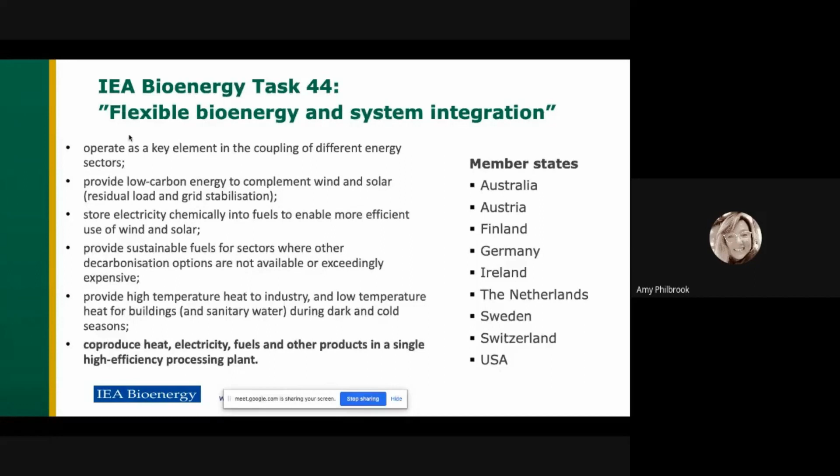I'd like to give a big shout out to Lisa for organizing this and all the other webinars. There was a lot of interest in attending, as you can see from the very good attendance. The first presenter today is from Australia, Richard Gorman, CEO and co-owner of Kalfresh, a Queensland-based vegetable farming company which grows and sells produce to retail and food customers in Australia and overseas. The work that Richard and his team are doing has really inspired the topic today. Richard, I'd like to invite you to give your presentation and perhaps introduce Kalfresh as well.

Thanks. Kalfresh is a vertically integrated vegetable processing business. We grow, pack and sell vegetables.

Now, part of our future is further processing, which involves more buildings, more supply, and above all, more energy - energy to process the crops - and that's provided us with a few challenges.

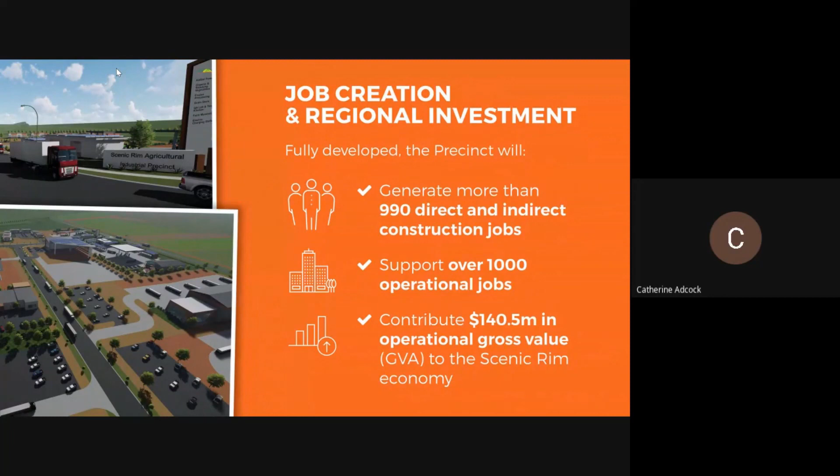Some of the challenges we face are that as the specifications for what we grow get harder and tougher, we've been focused on creating use for our waste. But we've now realised, once we started looking into anaerobic digestion, that you provide a waste solution for other people around you.

So we saw the opportunity to create base load renewable energy. That got us thinking, well, we're energy producers - whether you're eating it, or putting it through your digester, and we're consuming it to cool the crops or heat the crops, to us it's all energy.

And then the other energy we consume a lot of is nutrition in the way we feed our crops. In the last 5 years, we've really increased the amount of organic fertiliser that we use.

Currently we're one of the largest users of a by-product of ethanol production called Dunder, out of an ethanol plant in Sarina. And so we've learned to use the high volume, low concentrated liquid forms of organic fertiliser.

And I guess we thought, well, let's have a look at co-digesting not just our waste, but some of the energy crop that we can grow in rotation, and see what we can produce out the other end of it. And let's put a value on that as a fertiliser.

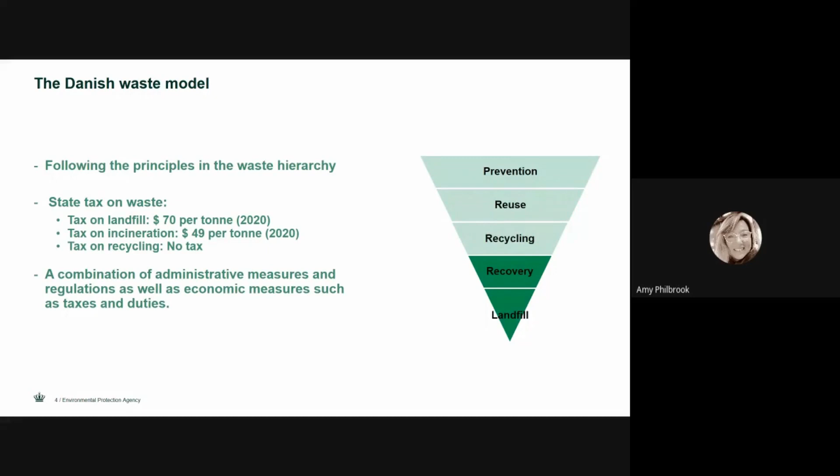One important thing when it comes to the Danish waste model is that household waste is a municipal scheme, collected in a municipal scheme, so that has one stream. Businesses are a private scheme—different kinds of service sectors, construction and demolishing, and agriculture have their own system with private collectors. They also are part of the pre-treatment system and become part of the whole waste treatment system. But the collection is very different between the household and the businesses, and that's the important part here. I will come back to that.

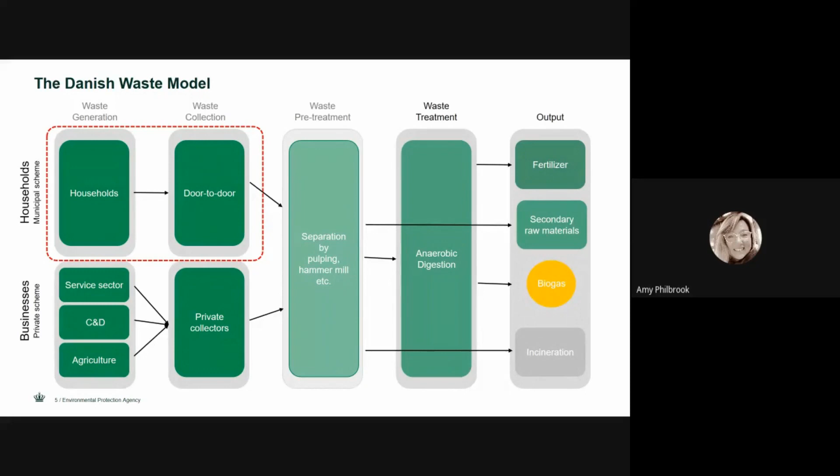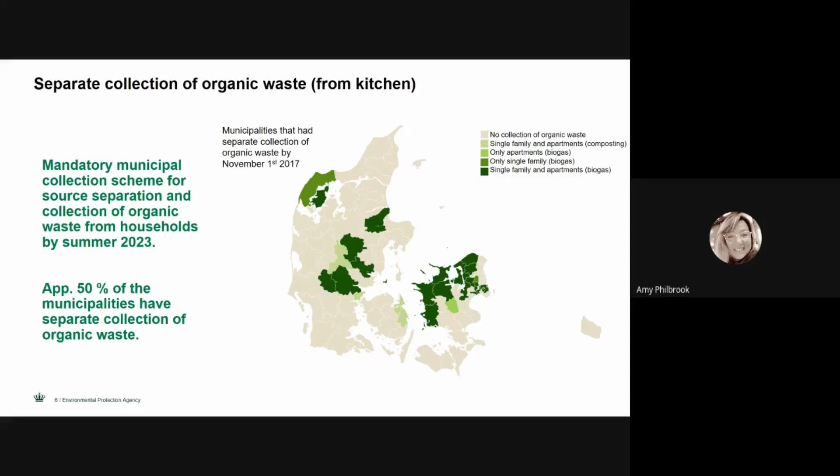Well, if we look at the feedstock, now it's going to be more interesting for all of you. We have a lot of pigs in Denmark—actually, the number of pigs in Denmark is 6 times larger than the number of human inhabitants, and that gives us a lot of manure. It has nearly no physical impurities, so it can just be put into biogas plants.

Then we have this focus on circular economy, and it gives us the food waste from the service sector. It has some physical impurities, and then we have industrial food waste. We also have some physical impurities that could be different kinds of packaging, and then we have the households, and that's the big challenge in the system in Denmark.

In some places, some parts of towns, they are not that good at sorting the waste, so we have a lot of plastic, metal, textiles, glass, all kinds of things that go into the household bin for organic waste, and we have to deal with that. That's where we are looking at different kinds of technologies, and we have some very good companies in Denmark that have some very good pre-treatment systems where these technologies can take out a lot of the impurities, even though there will still be some kind of impurities, and that's what we are looking at.

Then the material goes into anaerobic digestion, and becomes biogas and bio-fertilizers. This is a huge product, and there's a huge amount of biofertilizer coming from these anaerobic digestions. It's important that we keep it as clean as possible, so we avoid contamination of the environment.

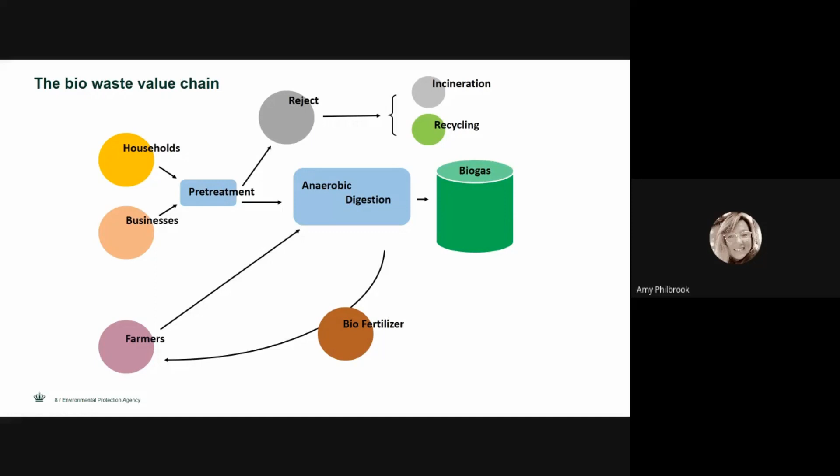We have put up a quality control system, based on the statutory order, with a guideline saying the production line has to take daily samples and mix them into a monthly sample. What we're looking into is content limits where plastic, glass, and composite materials larger than 2 millimeters have a limit of 0.5 weight percentage of dry matter. Plastic larger than 2 millimeters is only allowed to be 0.15 weight percentage of dry matter, and more importantly, maximum 1 square centimeter per percent dry matter in 1 liter of biopulp.

These are the limits for physical impurities, and plastic is very important here because it's the one that contaminates the most. That's why we're happy to have companies that are actually capable of producing a product that fits these standards.

Where do we do the sampling? In Denmark, we do the sampling before the anaerobic digestion. The reason is that we're not allowed to make a dilution where we just put the contamination into a bigger volume and add water or something. So we just have less contamination material in one big batch—we have to do it before.

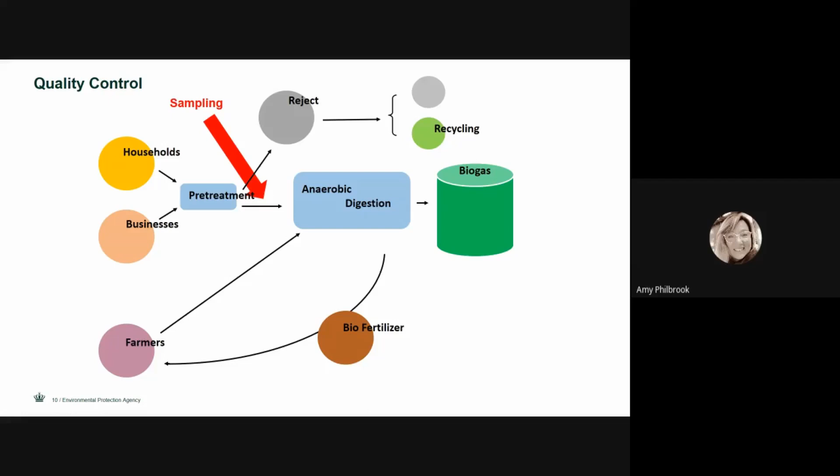The anaerobic digestion in Denmark mostly contains manure from pigs that doesn't contain any kind of plastic. So if we take the sample after the anaerobic digestion, we'll hardly find any impurities. So the sampling on the pre-treated material has to be before it's mixed with manure from the farmers. That's a very important thing, so we're not diluting the contaminants into the environment. I think that's what I wanted to say, and I hope you got at least something out of it.

No, definitely, that was great. Thanks, Rasmus. Just invite people to put their name in the comment box, and then Lisa will call on you for questions. And just to finish off the Denmark side of things, I think Lars is on the line and was going to add some commercial insights from Denmark.

Yes, hello everybody. When we look at the Danish model, as Rasmus told you about, we have right from the beginning looked at the digestate as a valuable fertilizer, and that's quite natural. In Denmark we use it also because we have a high focus on circular economy, and using the digestate as a fertilizer ensures the circular economy. In Denmark, we use the digestate as a liquid fertilizer without any problems.

When we go outside Denmark, it can be more difficult to use the digestate as a fertilizer, because in some countries it's not allowed. Then you suddenly get a problem with getting rid of the digestate, and instead of a valuable fertilizer, you have a problem that could cost you money. So it's very important, when you look at the commercial side, that you can put some value on your fertilizer, so it can be a kind of income instead of an expense.

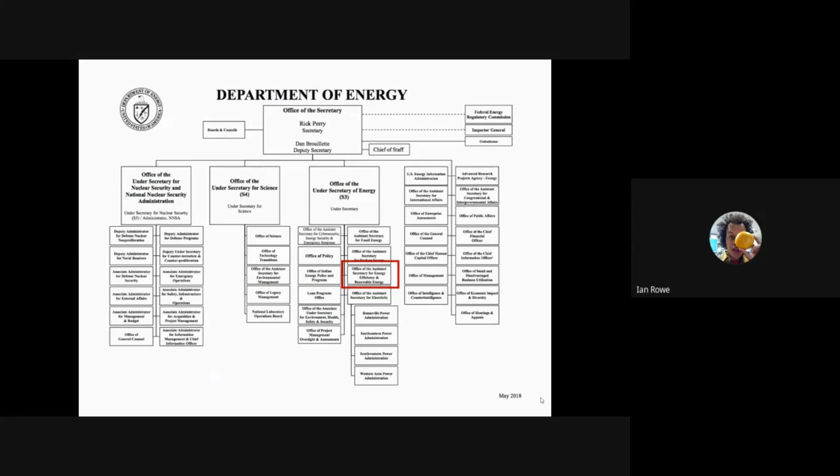So here's the outline of the Department of Energy structure. That tiny box in the middle is what the Department of Energy decides it needs to spend on energy efficiency and renewable energy, unfortunately. That comes to about 8% of the entire department's budget. I'm in the Bioenergy Technologies Office, which sits within the Office of Energy Efficiency and Renewable Energy.

That office is broken out into 3 different wings: renewable electricity generation, so wind, water, solar, geothermal; the energy savings wing, which is advanced manufacturing, homes and buildings; and lastly, the wing for sustainable transportation, which includes the Hydrogen Fuel Cell Technologies Office, our Vehicle Technologies Office, which does a lot of your batteries-type vehicles, battery and vehicle efficiency improvements, and finally the Bioenergy Technologies Office.

That's my office, and the one I'll talk a little bit about here. Notably, while we are under the Sustainable Transportation Office, a lot of our office is about just using renewable carbon as best we can, and not just making fuels, but also products, chemicals, energy, whatever, from biomass.

Our motto, I guess you could say, is to develop ways to use abundant renewable biomass resources to make biofuels and products that you would normally get from petroleum.

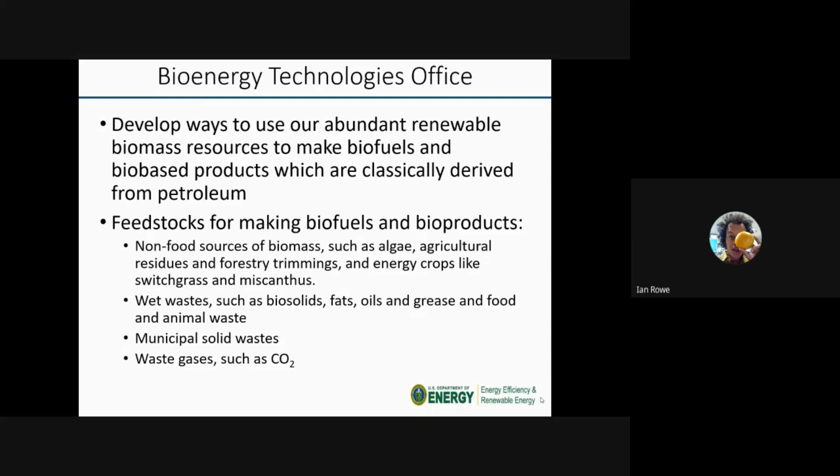We have a wide variety of feedstocks we look at here, but mainly non-food sources of biomass, such as dedicated energy crops or forest trimmings, algae or other waste sources, such as biosolids, fats, oils, greases, foods, and animal waste. We're also increasingly looking at municipal solid waste and waste gases like CO2, biogas, etc.

Just for some scale here, our office is about a $240 million office, and the funds go to applied R&D work at both the DOE National Lab infrastructure, which is 17 national labs across the country, and also we fund a lot of that work into the private sector and academia. Roughly half of our money goes to the DOE National Labs and half goes to private industry or academia.

The office is divided into 5 technology programs: feedstock supply and logistics, so gathering up the biomass, getting it to where it's got to go, pre-processing it; advanced algae systems, so growing algae, procuring algae, improving algae cultivation systems.

The conversion team, that's my team, is the actual process of taking whatever biomass or renewable carbon source you have and converting it to fuels, chemicals, and products. Our demonstration and market transformation team is the crew that works on scaling up this technology, taking it from bench scale and figuring out how to make this something that could be deployed at commercial scale.

And lastly, the analysis and sustainability team, which focuses on ensuring that our work is aiming to meet certain techno-economic and life cycle assessment goals. So like I said earlier, we take a broad view of what renewable carbon resources we take in.

Of course, we look at the carbon cycle, leveraging the land sector and photosynthesis to generate biomass, and then taking that biomass, converting it to fuels, chemicals, and products. Increasingly lately, we've been looking at other sources of carbon as well, so MSW, waste plastics, whatever. The idea there being, once it's something we've dug up and brought to the surface, it's part of the biosphere and it's time to deal with it. So we consider that all feedstock we're looking at.

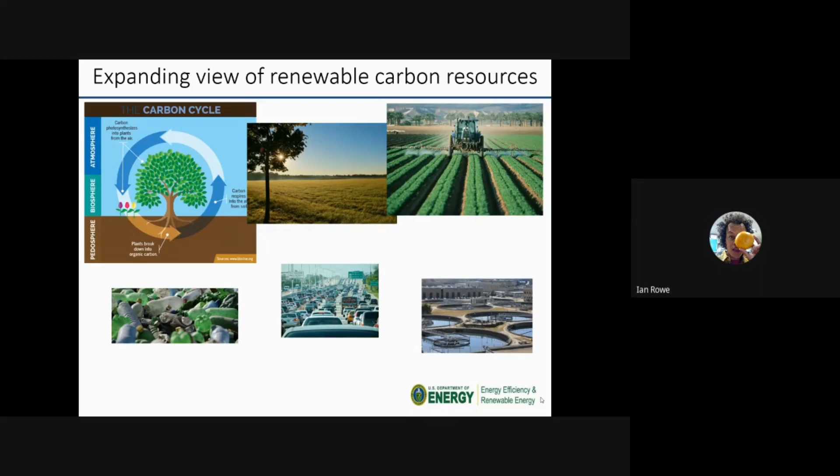Carbon dioxide is another feedstock we've looked at more recently, so we have a lot of efforts on that, and I'll talk about a few of those here. And lastly, most specifically, wet waste, ag waste, etc. That's what the wastewater treatment facility on the right is supposed to show. So we look at a lot of different carbon sources here.

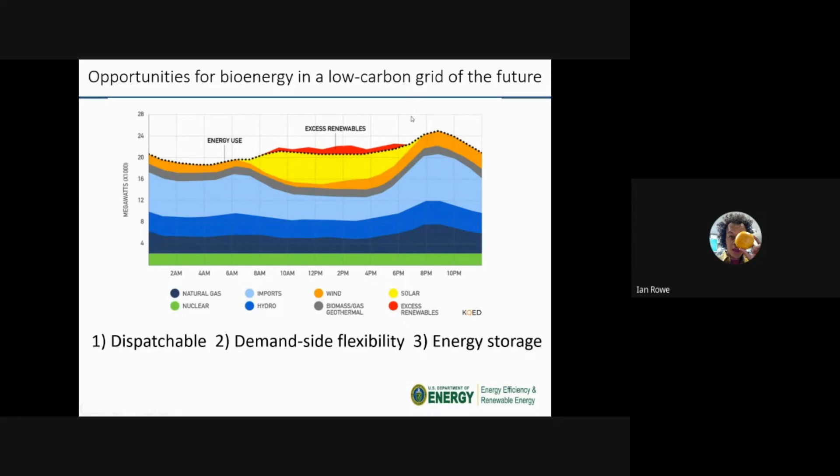So now I'm going to dive into an example of how AD can provide dispatchability, demand side flexibility, and storage. As I was saying, conventionally, biomass goes into anaerobic digestion and generates a mixture of methane and CO2. You can provide some demand side flexibility in that by, when you have a curtailed situation or a situation where electricity is abundant, you can split water, generate hydrogen, and feed that hydrogen to your anaerobic digestion system, essentially adding extra reducing equivalents to the system.

And you can increase the carbon conversion efficiency of the process. Instead of it being two-thirds methane, one-third CO2 coming out the other end, you can drive closer and closer to getting more and more of your carbon into methane versus into CO2.

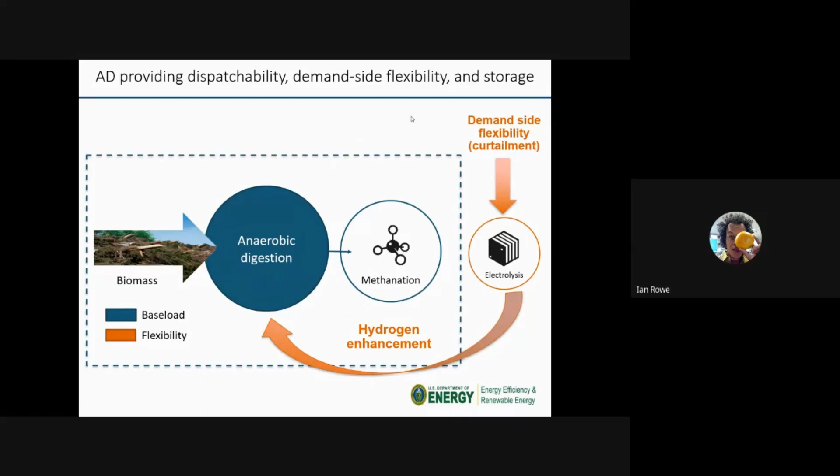So now a few specific projects that we have on this. The next two I'm going to talk about come from a funding opportunity announcement we put out in 2019, where we were specifically asking people to rethink anaerobic digestion. So take an anaerobic digestion process and, using electricity to add reducing equivalents to the situation, increase the carbon conversion efficiency of the process. I'll show you 2 of the more innovative awards we have from that. These are projects that I currently manage that, well, in a different world, I would go visit regularly, but I haven't gotten to see them yet, but hopefully soon.

So this first one is a project at Washington State University, and it's an advanced pretreatment and anaerobic digestion technology for increased conversion of sewage sludge to bio-natural gas at wastewater plants. The idea here is nominally they would look at feedstocks such as sewage sludge, wastewater, or food scraps, but also several of these projects that are like this and similar will use ag residues, other agricultural processes such as manure, and feed those into the anaerobic digester.

But the two main innovations for this specific project are an advanced wet oxidation and steam explosion pre-treatment of the undigested solids from your first stage AD. So you go through AD once, you get your methane from it, but you also have your residual solids. The idea here is that those more recalcitrant solids you would then send through another process to make the carbon more labile, such that it could go through a secondary process of anaerobic digestion, and then you could collect more methane from that. The second innovation here would be up here in this corner.

You see the idea that all the methane gets fed up here, and up here you have a biomethanation reactor, with an immobilized surface where you grow specific organisms tethered to that surface. You can feed the system hydrogen, and the organisms will use that hydrogen and convert the CO2 in the biogas to methane, giving you pipeline grade natural gas. So instead of being two-thirds natural gas, you now have closer to 100%, with the end goal of increasing the carbon conversion efficiency to over 70% of the process.

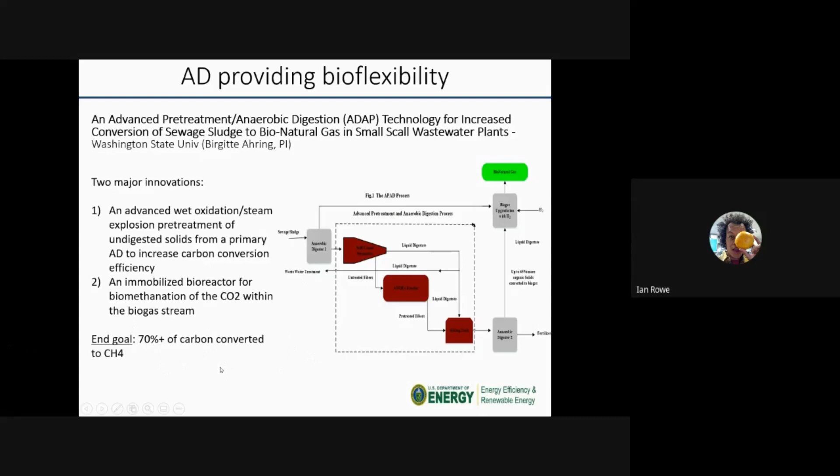The second project from this call for proposals was a novel and viable technology for converting wet organic waste streams to high value products, out of the State University of New York, Albany. There are three main innovations here. Similar to before, this takes sludge and food waste up front, but is likely applicable to many other wastes commonly put through anaerobic digestion. To increase the lability of that carbon, they put it through thermal hydrolysis, which isn't that innovative—there are plenty of processes that do that, like the Cambi process.

But this one adds the innovation of using sonication to increase the carbon conversion efficiency. You sonicate the incoming carbon stream to make it more labile for the organisms to convert it to intermediate volatile fatty acids. Then liquid-liquid extraction is used in the AD system to remove those volatile fatty acids prior to methanogenesis, so that instead of these VFAs getting converted to methane—arguably of lower value than VFAs—you can recover your VFAs and also some higher chain alcohols, and send all of those to an upgrading scheme later, which is outside the scope of this project.

The other interesting avenue this project explores is sending a stream of the incoming waste to a microbial fuel cell mixed with a microbial electrosynthesis cell, generating electricity from the waste stream coming in. That electricity can be used to electrocatalytically reduce the CO2 in the system to generate even more volatile fatty acids, overall increasing the carbon conversion efficiency of the process.

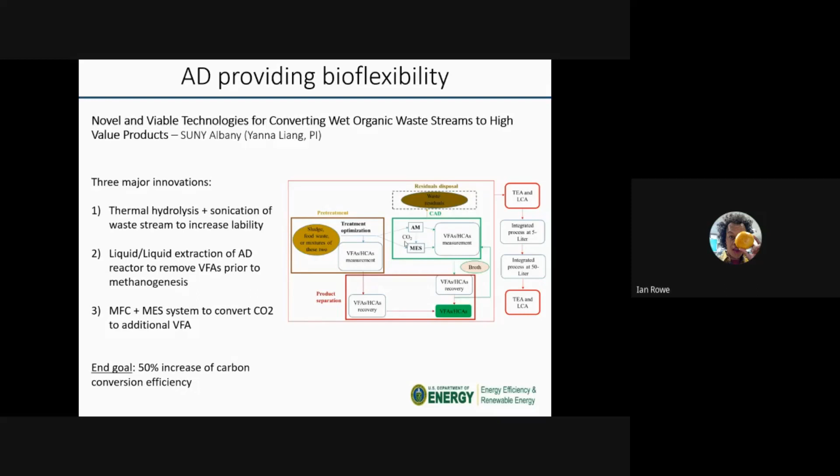Lastly, this project is at a larger scale, and I thought it would be relevant to the conversation here. This is with a company maybe many of you are aware of, Electrochaea. They're based out of Europe, and they're collaborating with the National Renewable Energy Lab in Golden, Colorado, and Southern California Gas, the largest natural gas utility in the U.S., to work on biomethanation.

What you're seeing here is a 700-liter bioreactor set up just outside the National Renewable Energy Lab, coupled with a 250 kilowatt hydrogen electrolyzer. Biogas goes in simultaneously with hydrogen from the electrolyzer, which in theory you could generate when you have a curtailed situation or when electricity hits a certain low price. You feed both into the bioreactor, and they can pretty readily produce a stream of pure methane on the other side.

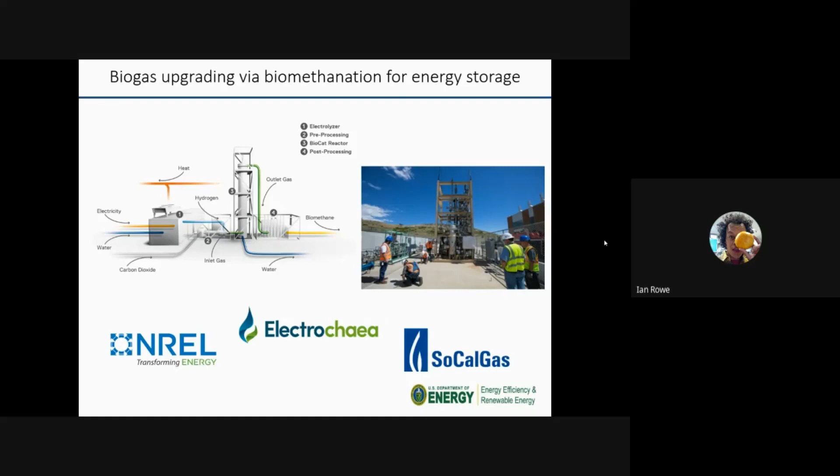This kind of technology is an example of the more innovative work we're trying to use to see how much industrial interest there is in scaling up different biomethanation processes. There are also a few others we have at Lawrence Livermore National Lab working on an immobilized bed reactor, where the biology is tethered to the reactor instead of using a free-floating stir tank type reactor.

Anyway, that is all I had. Here's my contact information—feel free to reach out if you have any questions, complaints, or otherwise. Besides that, I'm happy to take questions.